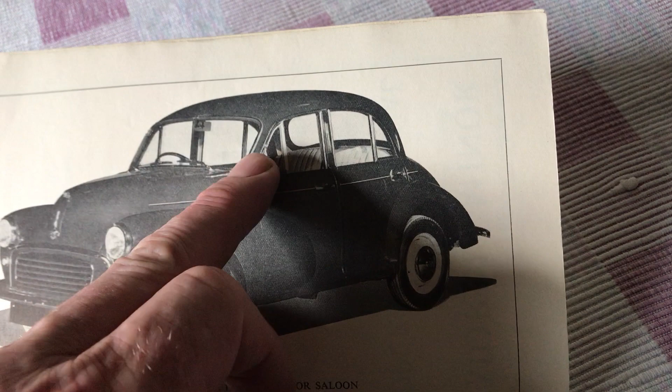I think Sir Alec Issigonis designed them. The earlier cars had a split screen with a bar down the middle, because they couldn't make a large piece of glass in those days - they could only do two small pieces, so they had a bar. Those are the very early ones, but this one looks like it's from the 1960s.

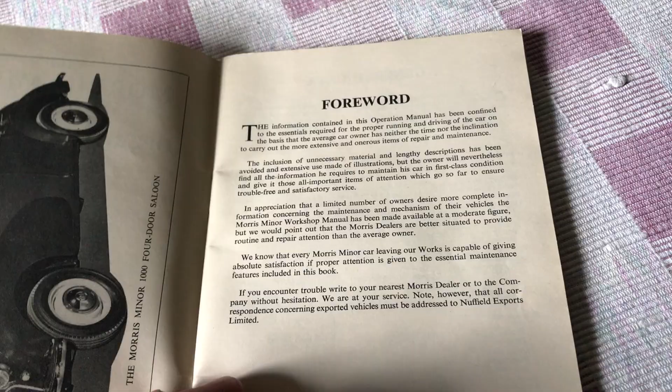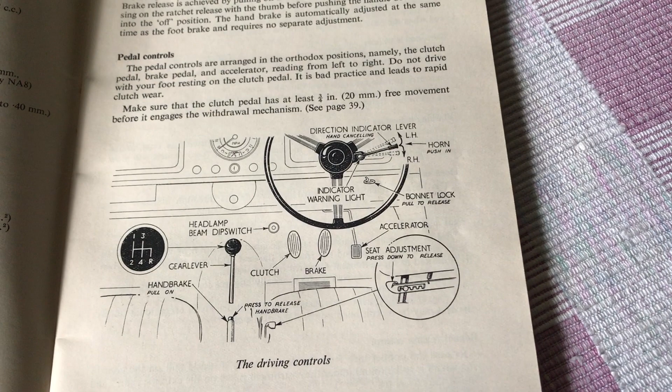Lovely cars. Friends of mine had them because back in the 80s they were quite easy to pick up - nobody really wanted them because they were of a day, a style, as it were. Only the hardcore mechanical enthusiasts would go for them because they were quite difficult to maintain, with grease nipples, a grease gun, everything. It wasn't like modern driving in a way, but I loved them to bits and thought they were awesome.

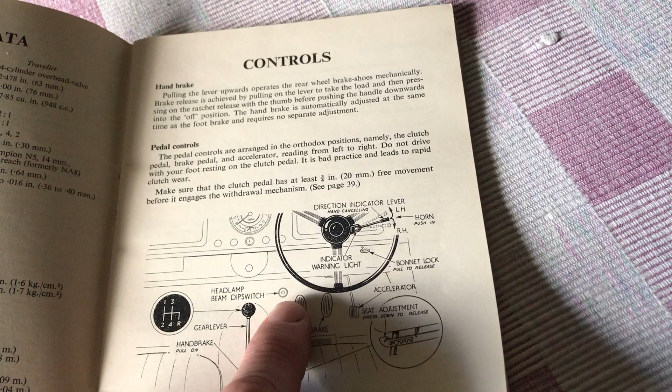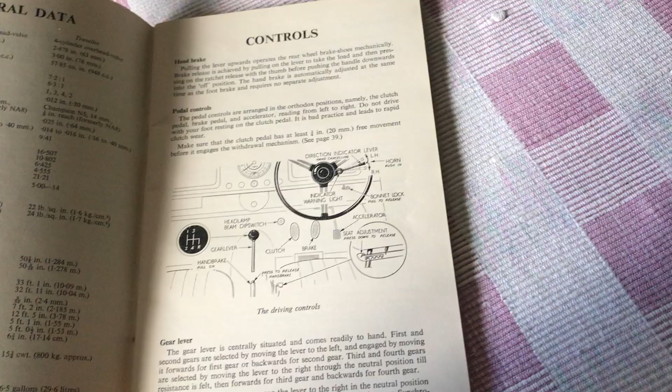The old headlamp dip switch is still on the floor. So you had a 4-speed synchromesh gearbox. I just thought they were awesome, I really did.

So there's bits and bobs and what have you - flashing indicators. This sort of thing was quite new, because on the older versions of the car, they didn't have indicators on the light cluster.

Sorry, my fingers are dry, I can't turn the pages. On the older cars, they had a sort of thing that swung up out of the sidewall. In fact, that may well have it. I don't know, does it have it? I can't see, it might well have it.

That was the indicator. When you turned left or right, this arm used to come up, rising up out of the ground sort of thing, like some sort of undead. It had an orange light that would glow, telling people you were turning left.

And before that, of course, you just stuck your arm out the window. Left was like that, right was something like that, and stopping was that - sort of Benny Hill stuff, innit, tapping the old bald head, but no, that's how they used to do it. Believe it or not, going straight forward was that.

These were the hand signals you had to learn in the highway code.

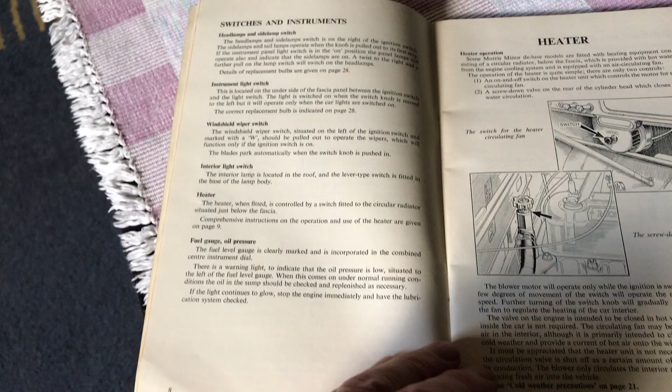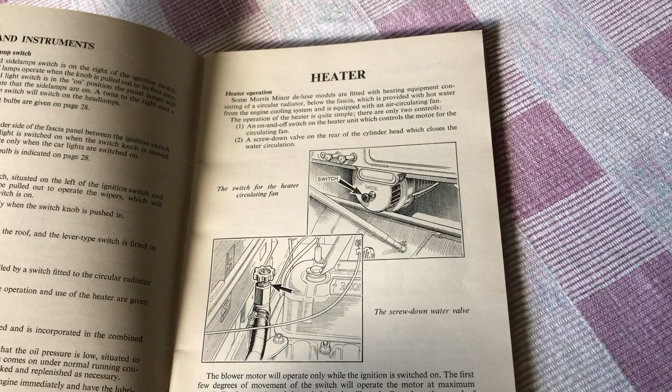It says heater here, which is all good, because heaters were rare in actual fact in early cars in the UK - your heater was your good lady wife sat next to you, and the pair of you warmed up the environment. But I can see here they've got a switch for the heater circulating fan, so that's all good, and there's the fan.

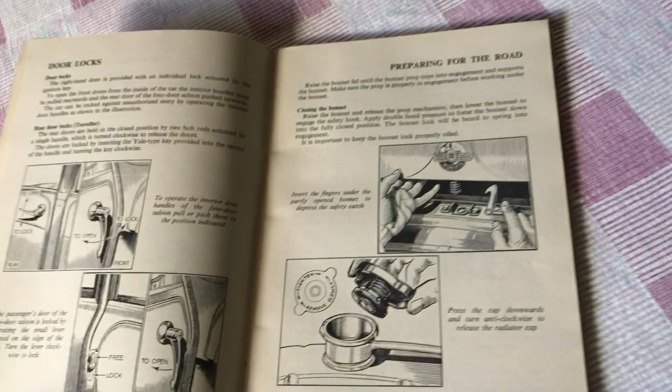There's quite a lot to do in these cars, to be honest. Door locks - you have to maintain them all because they used to very quickly seize up and stop working.

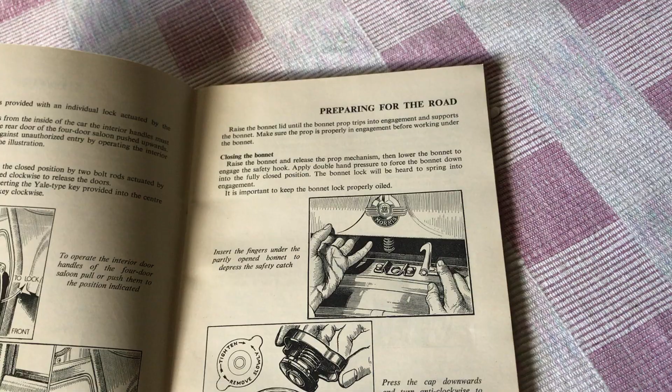I remember on my mate's Moggy, Abe was his name, a great friend of mine. I'm not in touch with him anymore, which is a real shame. I hope you're watching this, Abe, but I doubt you are, mate. We just lost contact, sadly - not that we fell out or anything, we just lost contact, which is a shame.

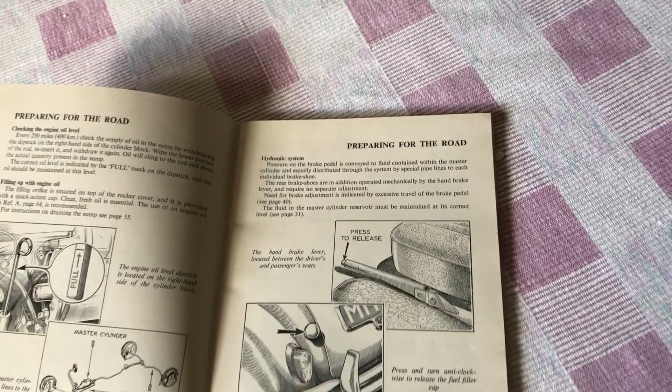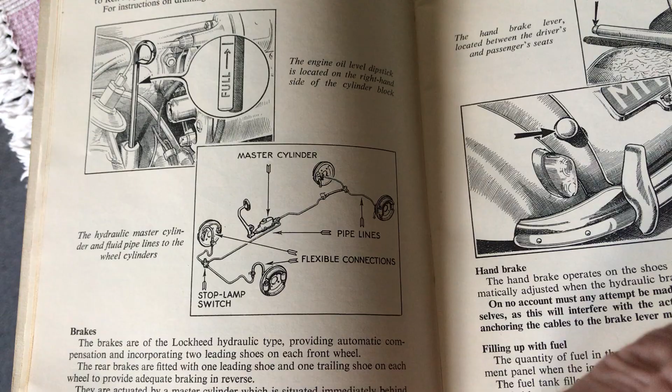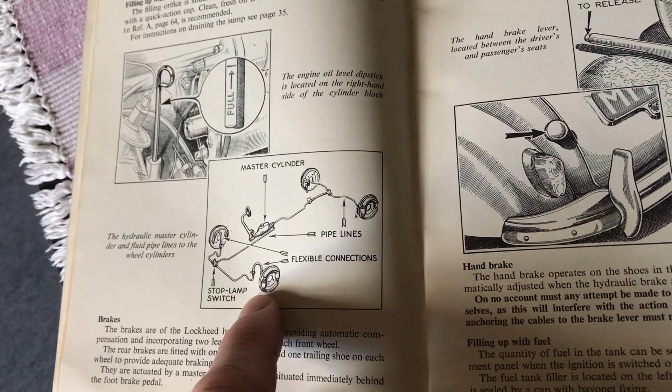Because a great friend of mine who loved all these old cars - look at that, the old brake system, hydraulic brakes. How many times were we under Abe's car? He would press the pedal and I'd turn the valve to let the hydraulic fluid out until it was bleeding, then tightened it quickly, and that got rid of all the air in the hydraulic fluid line. Otherwise you had to pump the brakes to stop, which was a bit unnerving.

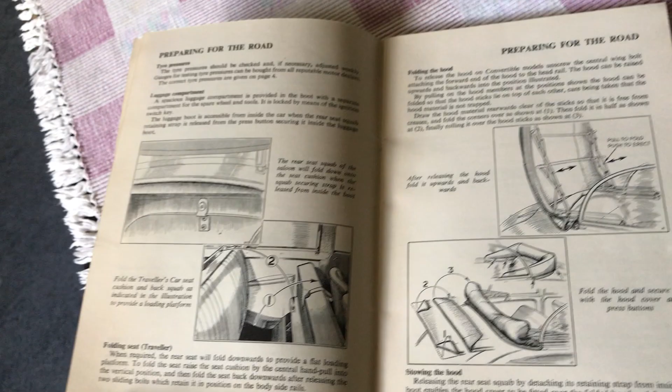I don't know, yeah, they did a convertible version, that's correct. And yeah, they did.

There's all sorts of, yeah, look, starting handle, you know.

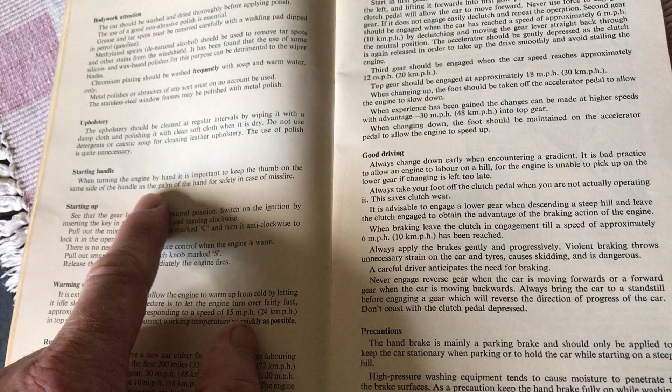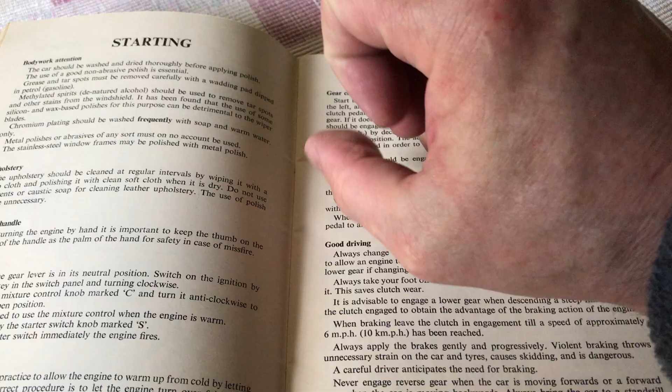Keep the thumb on the same side of the handle as the palm of the hand for safety, in case of misfire. If the engine misfired and you held the handle with your thumb underneath, it could blast back suddenly and knock your thumb off, literally, or dislocate it. So you had to hold the handle like that, with your thumb above the handle. If it misfired, all that would happen is the handle just goes away and you've got time to get away from it. Run away! Run away now!

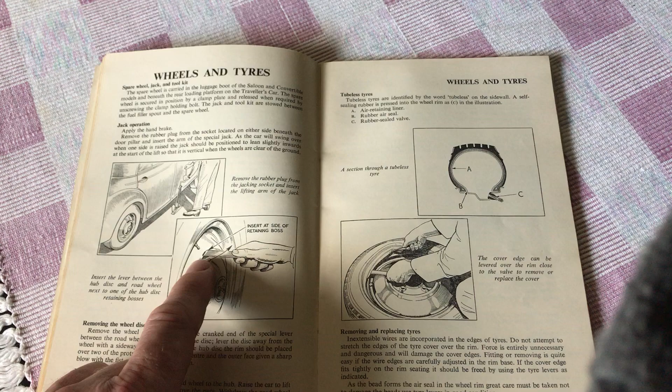But, so there's wheels and tyres. It's funny because I remember these old hubcaps. There were chrome hubcaps, lovely, and there was a hubcap remover. You hooked under it to pull it off, and it used to make a sort of noise as it hit the ground and span across the floor. Wheels and tyres.

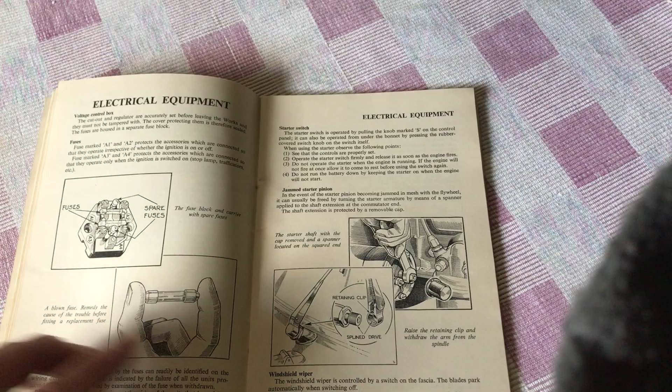Lovely old cars. Fuses - yeah, it's a blown fuse. I'm familiar with that feeling. But, yeah, there you go. All the old electrical equipment.

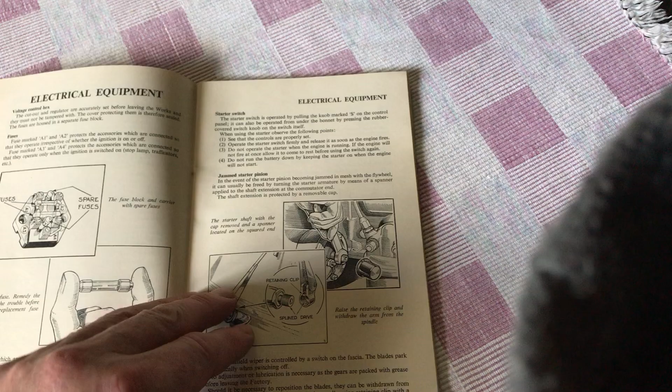Splined drive for the windscreen wipers. Beautiful, beautiful. But, yeah, lovely.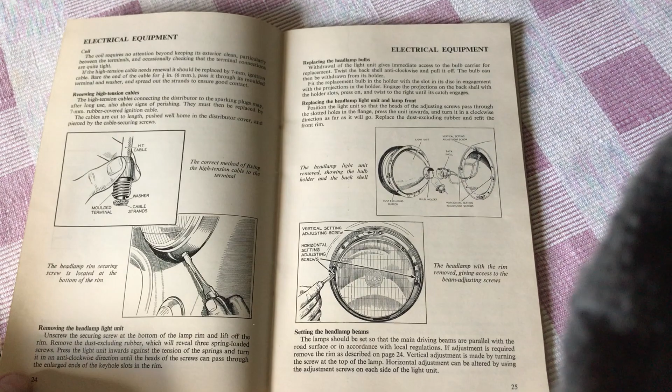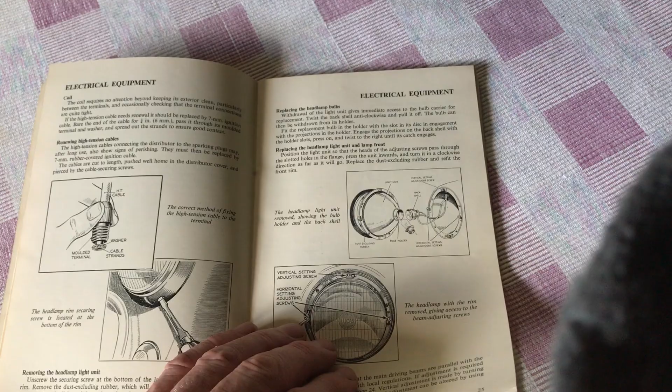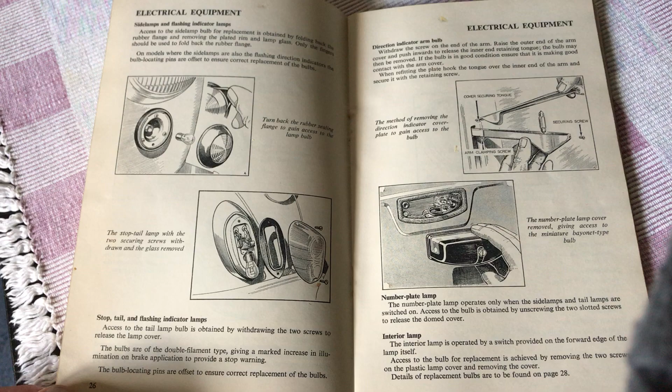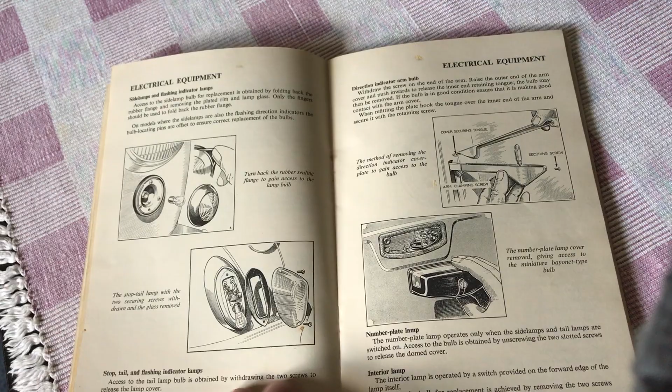There's the old headlamps there. You could adjust these screws to get the pitch right, so whenever I bought an old car, one headlight was up in the trees looking at the owls, and the other one was down looking at the road. It took a while to adjust them. You used to have to measure on the garage wall and draw X's where the lights should actually be pointed, then screw the things until they pointed in the correct direction. And that's obviously the rear lamp cluster.

So it's wonderful, there's the old speedo there, look. This thing used to kind of go between 0 and 20, you know. It wasn't an accurate thing like you'd progress with speed, just sort of like - oh, maybe somewhere between the two, mate. In here we're up, might be 50, might be 30. Can't tell you, but that was how it was.

There's the wiring diagram, so as basic as it could possibly get, I guess. These got the cable colour codings and things at the bottom there, look.

Yeah, awesome. Dead easy. It's done.

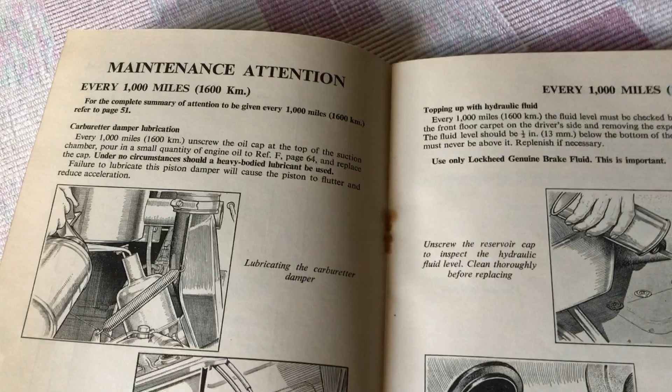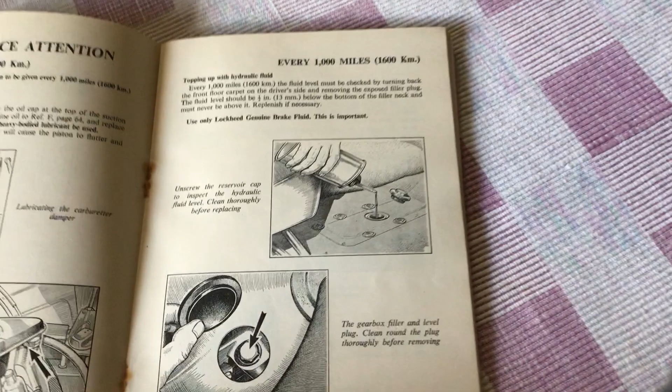Fingers of mine are dry. I'm getting so old now. I'm like a ruddy mummy, innit? I have to get bandaged up shortly because I'm drying out. I'm getting as dry as crisp paper, innit? As dry as freaking rice paper it is.

So there's the old SU carburettor where you have to top it up with oil. You can see there's somebody topping it up with oil, lubricating the carburettor damper. Quite a lot to do, to be honest.

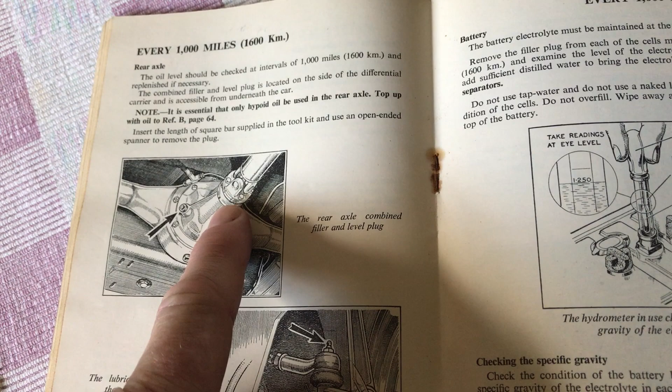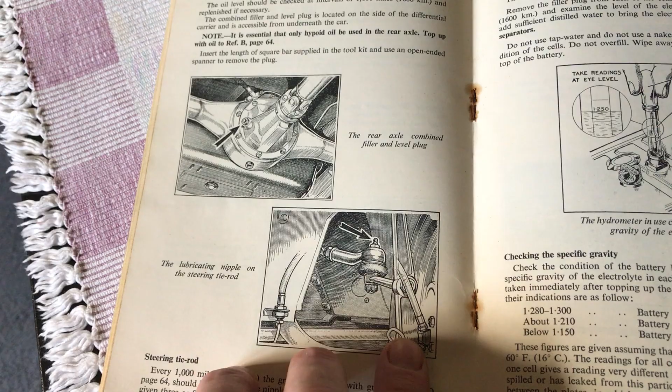But well worth it. There's the old rear axle. You had to look after that as well with a lot of greasing nipples. You see all these things here - that's to drain the oil, but you'd have to fill it up every now and then to make sure. And there are all these lubrication nipples on the suspension, swinging arms, trailing arms, or whatever, the tie rods - I think they call them steering tie rods.

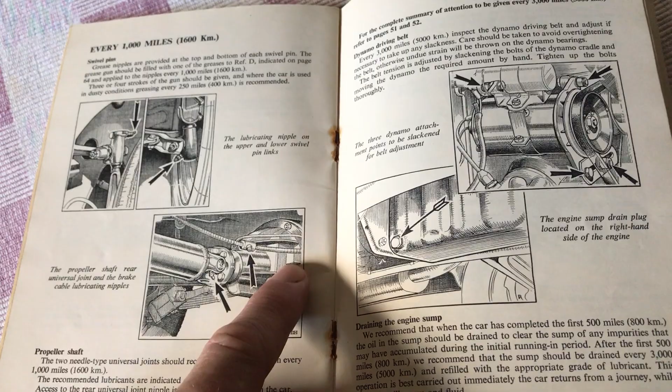So it was a lot of monkeying about, but I just enjoyed every minute of it, to be honest with you. The propeller shaft - not that there was actually a propeller, but that's what they called this thing that went to the rear axle to drive the wheels. You see, the engine was at the front, so it's rear wheel drive.

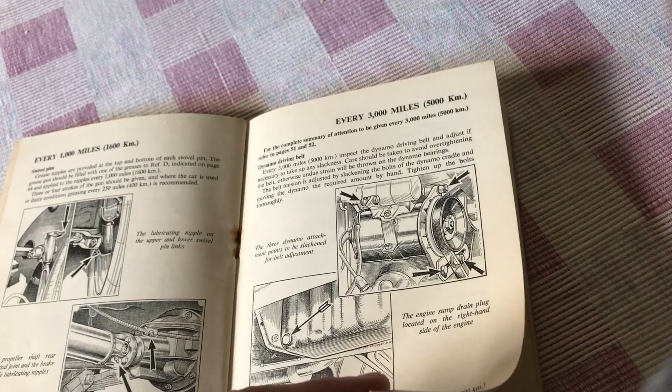Yeah, and then you've got drainage for the oil for the engine. Why can't I get my fingers to work?

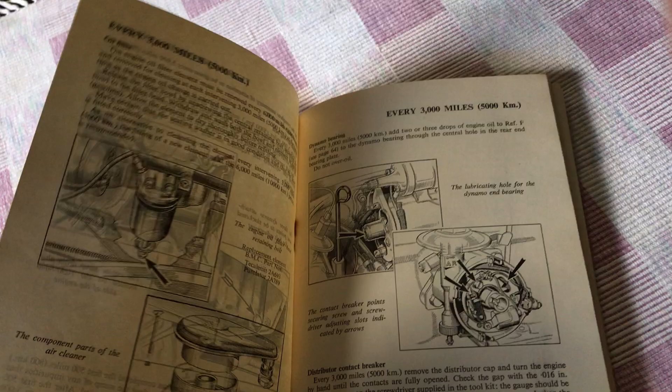Oil filter - it's like a renewable one by the look of it. Well, a cleanable one. Oh no, it's a part. So sorry, lies, oh lies. Don't listen to the man behind the curtain. But there you go, there you are.

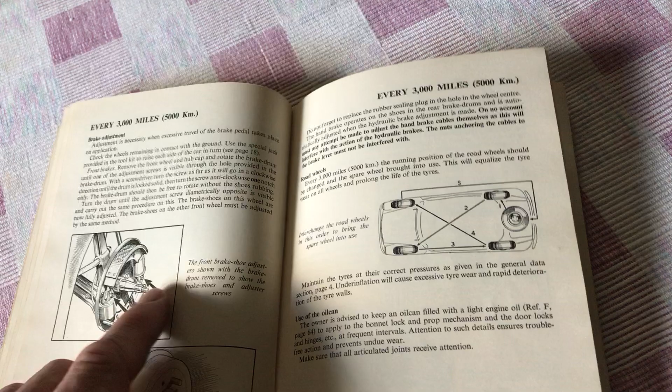So this is cracking on a bit, this video, but there's your front brake, drum brakes they were called, and how to adjust them. That's the slave cylinder, it's called there. And you had a master cylinder, which was the sort of main hydraulic thing.

And there you go, spare tyre in the back.

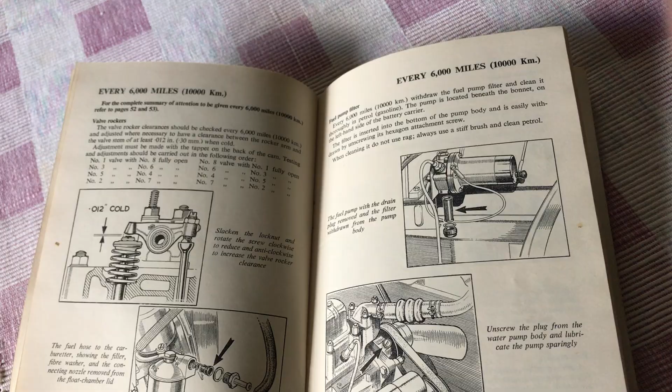Loved it. I mean, God, how many cars have I picked up in my life for under 50 quid? And obviously back in the early 80s, 50 quid was more than it is now, but still a darn good deal for a car.

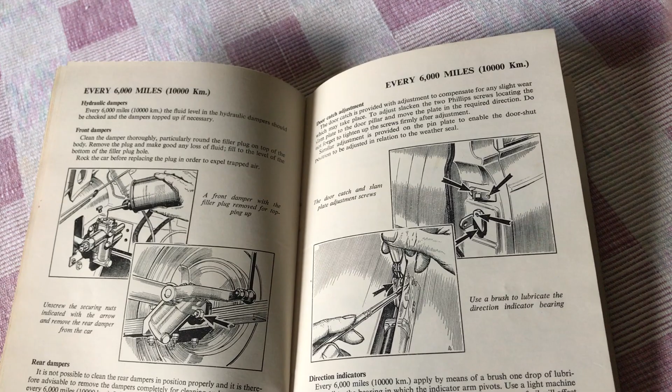We used to drive them until they ran out of MOT and then just trash them, then buy another, that's how we did it, when we knew it wouldn't pass the MOT, rotted.

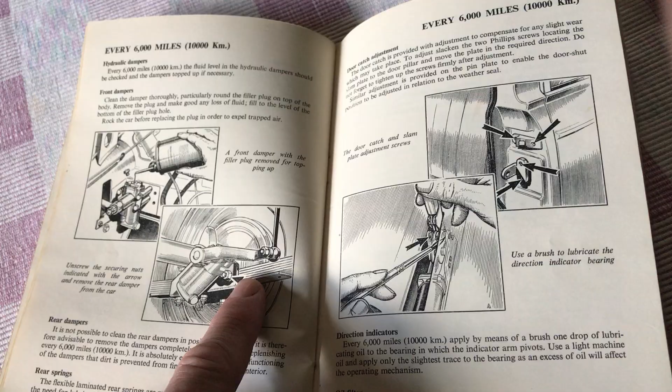This is the old elliptic spring suspension that they had in those days, which was pretty effective. I quite liked it. Door catch adjustment, yeah, stuff like that.

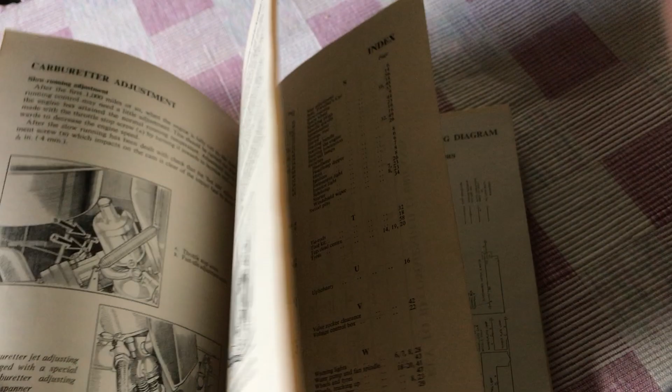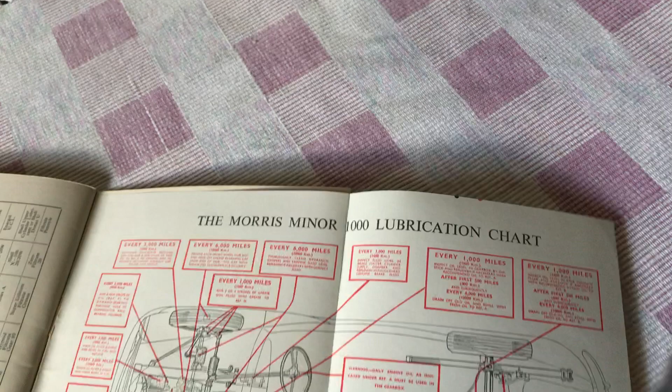And yeah, there's your lubricant, a lot of lubricant in it. Oh look, that's good, that's a nice fold out. There's your lubrication chart, so cool.

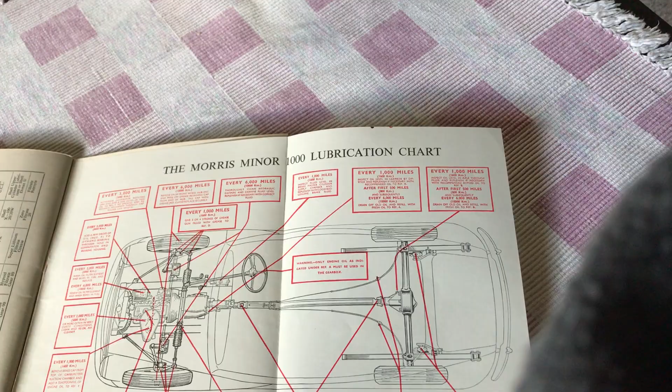So I still can't find any dates. There aren't any, so I don't know what date it was, but I would guess 60s, this one.